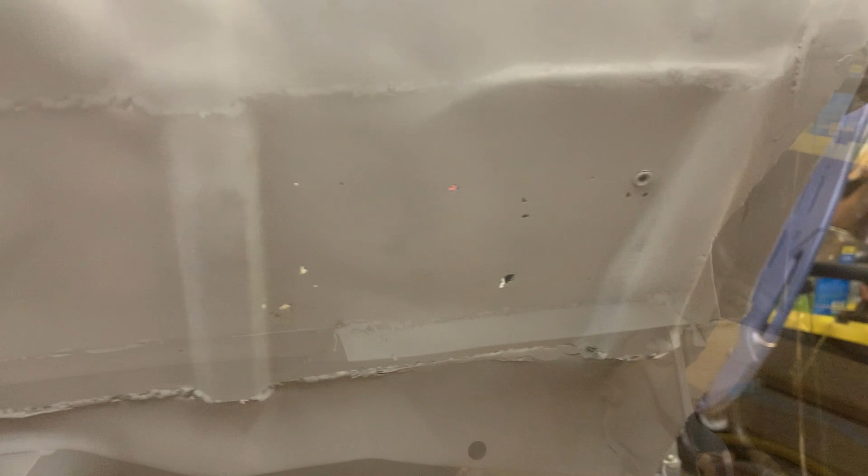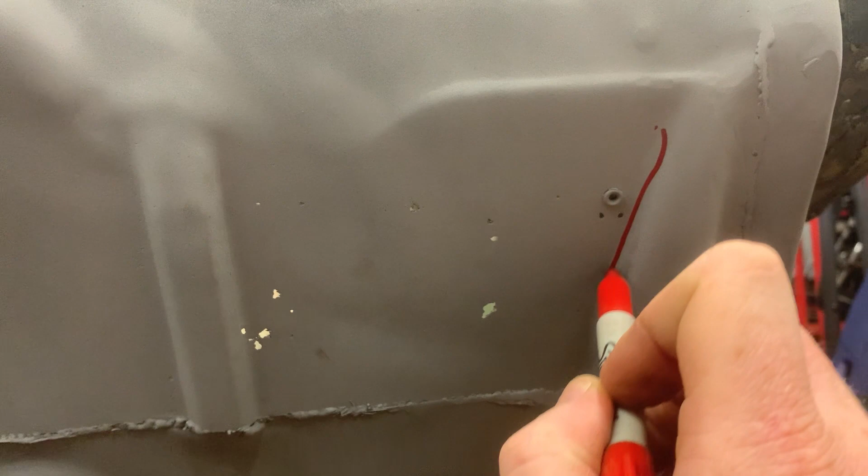So the first thing we're gonna do is come in here and mark where we're gonna cut it out. I'm marking really for you guys as I know where I would like to cut it, and I'm gonna come in and pretty much lay a line right down here and then across, make my line a little bit straighter. I want to stay above this weld because this weld has already been done.

And then we're going to cut down here, and we're going to cut across the top. Obviously my line isn't straight. We're going to try and make it as straight as possible so that we make a perfect square style cut, so it's a lot easier when we go to make our panel to cut out. So first things first, we're going to mark the rest of this, and then I'm going to start cutting it out.

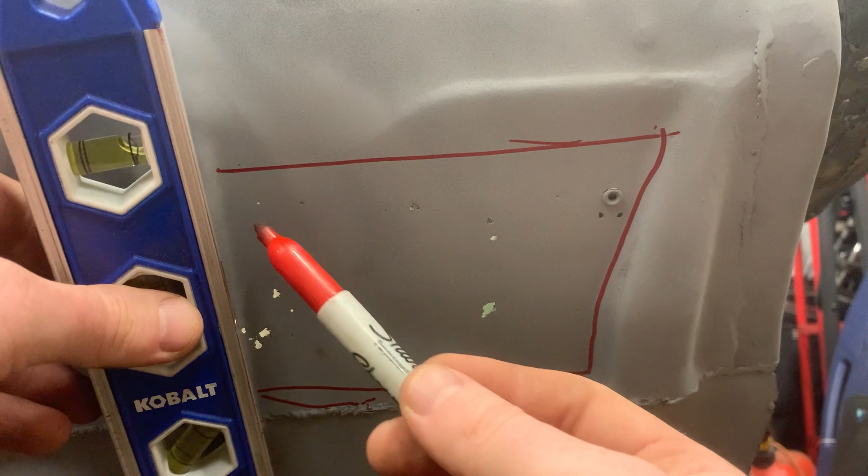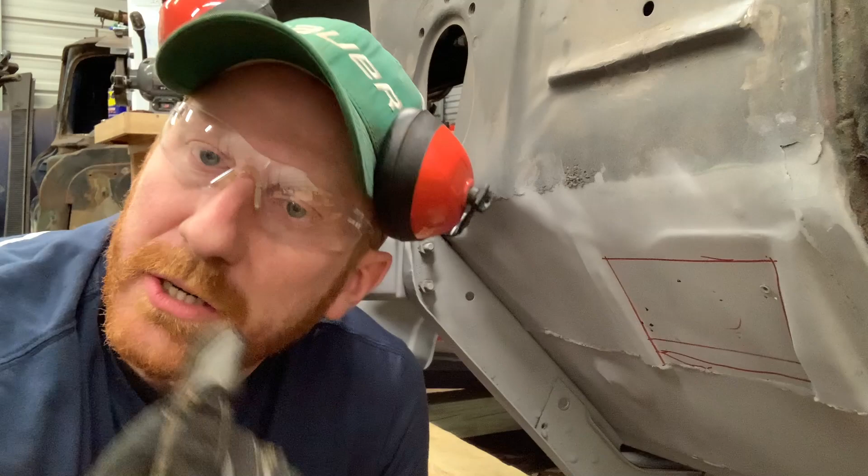All right, so we have the box where we need to go. So now we're going to come in with our grinder and our cutoff wheel, not a grinding wheel, a cutoff wheel, and cut out our box of dirty metal that we need to get rid of. Make sure you guys wear some eye protection. You don't want to get a spark in the eye and get an eye infection or even lose your eye. That's not worth it. And make sure you wear your hearing protection because losing your hearing will suck too.

So what we're gonna do is I'm gonna cut it out and we're gonna take it over to the table and line it up and measure it against some new metal and cut out a new piece.

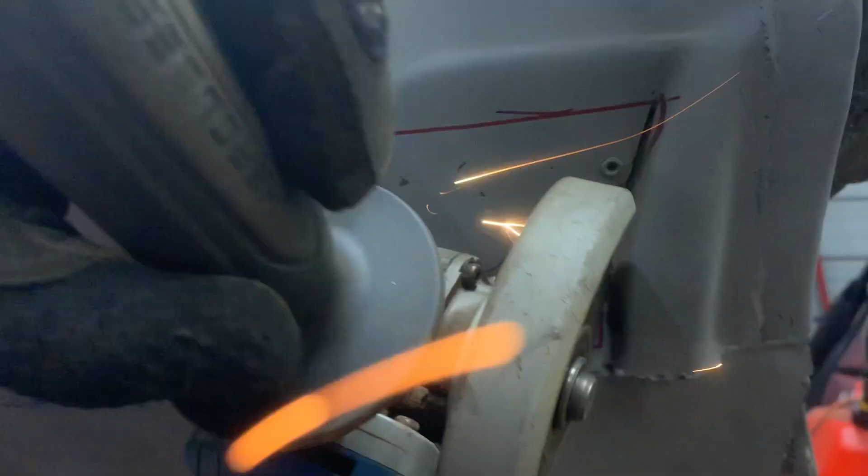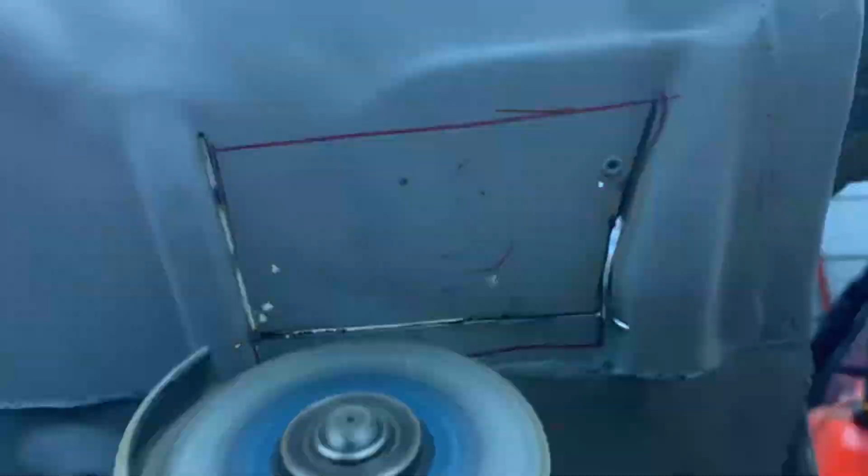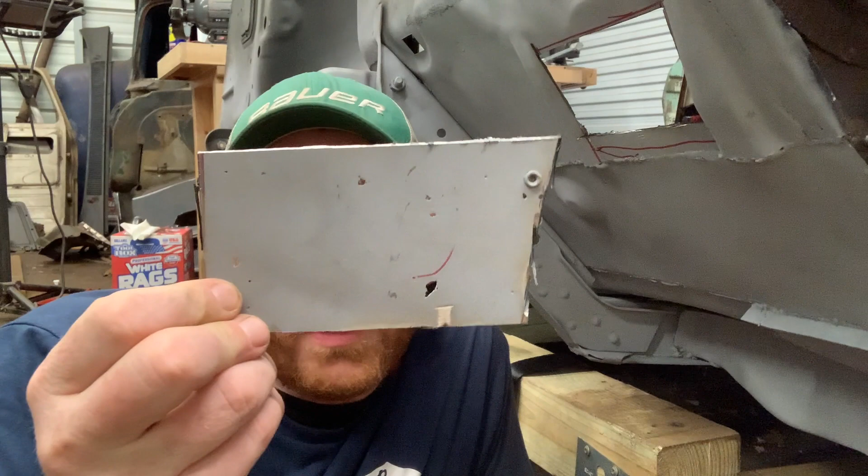So say goodbye to that dirty, ugly metal. And we look at this side and this looks pretty good. The metal looked nice and thick from the outside, but let's see what it looked like from the inside. And that was bad. So good thing that the sandblaster blew some holes in this. So we went and checked the rest. The rest is fine. Don't know why that one spot is just bad.

Like we come in here, this feels nice and thick and strong. So does down here, and so does the rest of it. So this one bad panel, it needs to go. So now what we need to do is walk over to the bench, take out some new metal, trace this, and cut it out so we can put the new metal in.

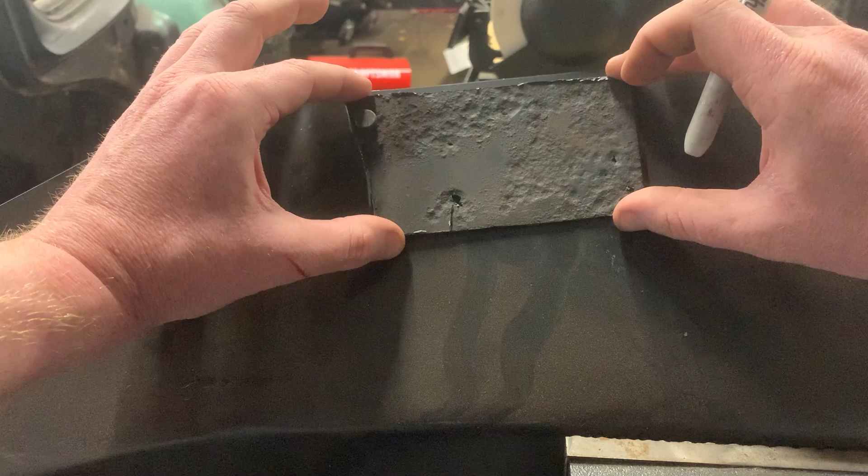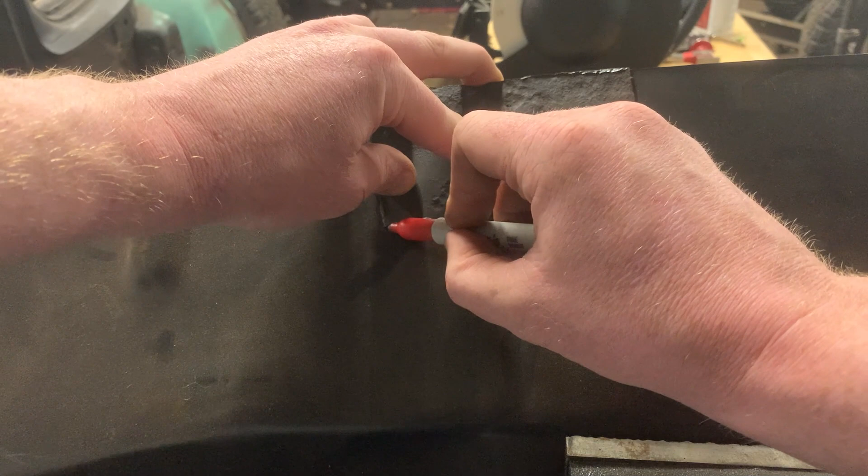All right, so we have our piece of metal right here, and what we're gonna do is line it up, and then we're gonna use this top line as our top half and come in here and draw some markings so that we know where to cut. So we have that, we have this side, and we have the inside that we need to line up like that. So there we go. So we have our box of where we need to cut right here.

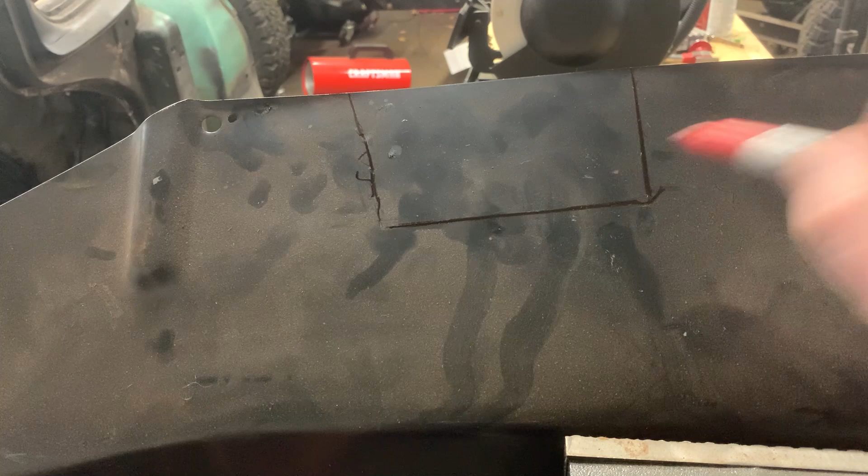We're probably gonna come in just a little bit on all of these lines so we have a gap for when we weld, so that when we're welding, it fills in the gap. So let's head over to our board real quick and talk about that. All right, so what we're gonna talk about right here on the whiteboard real quick before we cut this panel out and start welding is the gap.

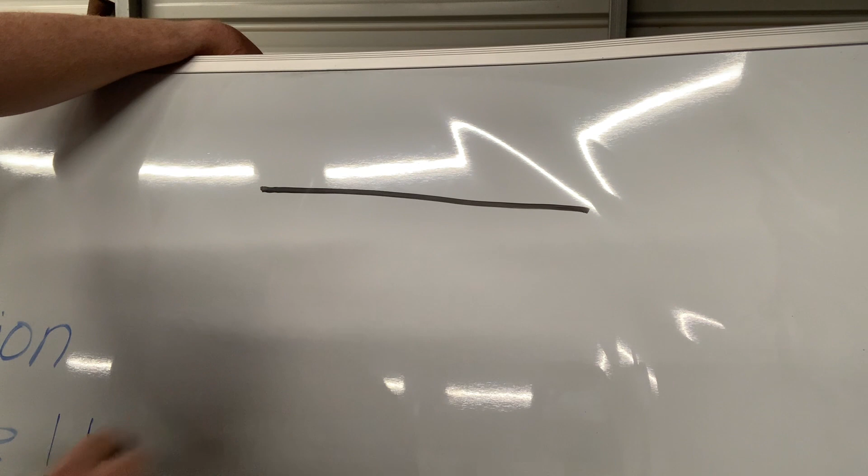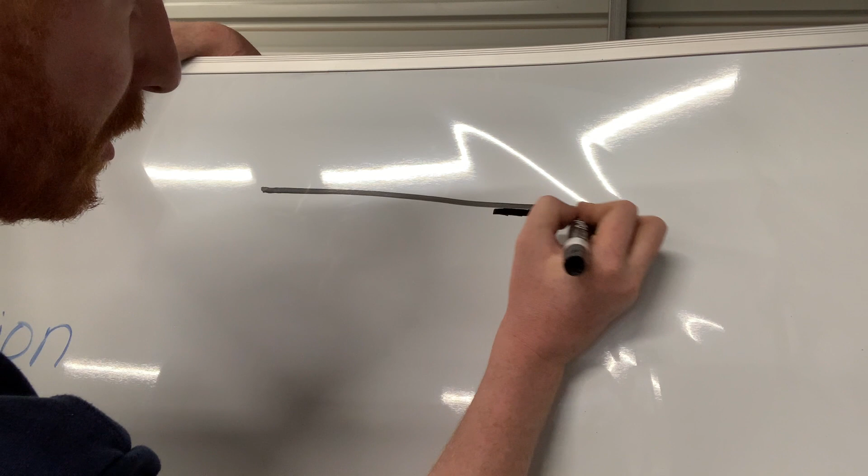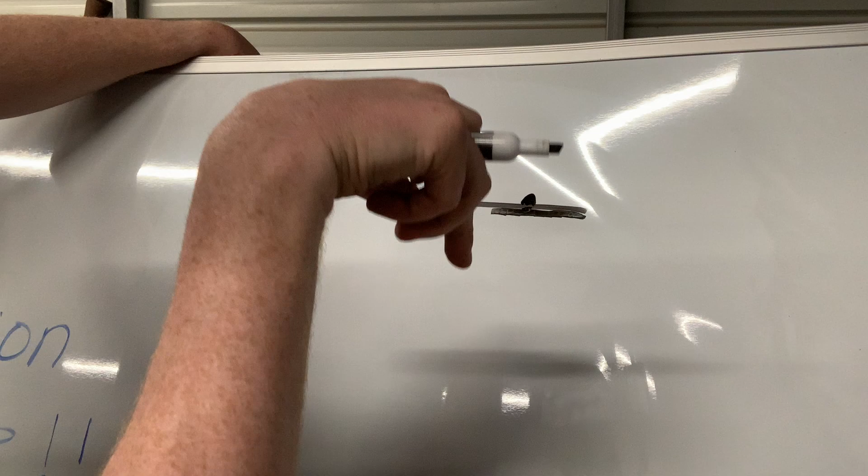So the gap that you have is gonna determine how good or bad a weld you have with the other panel. So if, say we draw right here, a piece of panel where we left pretty much no gap in between it and the two pieces of metal butt up, if we try and weld in there, we're just gonna get big, almost lumps on it rather than the weld penetrating. And that's what welding is all about, is penetration in between the two pieces of metal and making them get together.

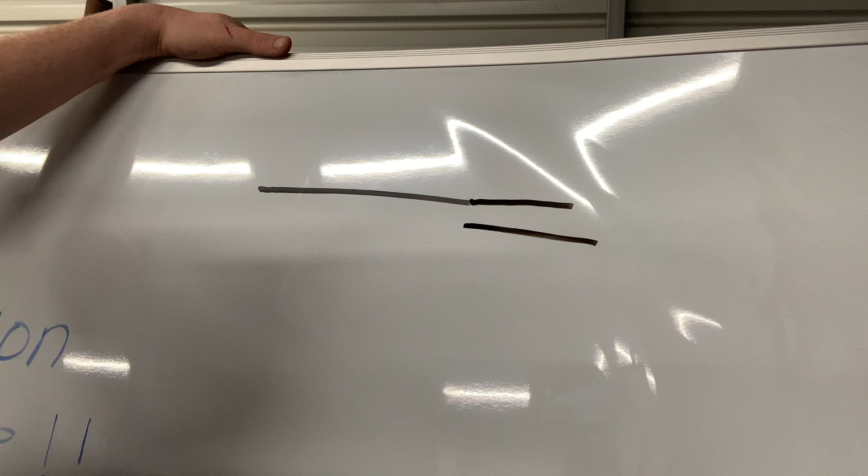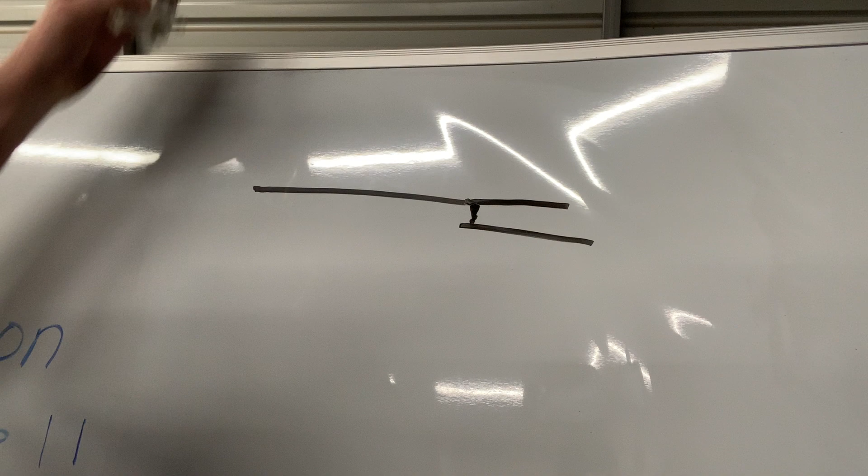So now, let's say we come in and we have our original piece of metal and we go too wide. We're gonna have to attempt to build up and make welds to combine them, which is not gonna be strong. This metal is gonna be weak, and when we go to grind it, it's gonna make that weld even weaker, where it's gonna crack and you're gonna have problems.

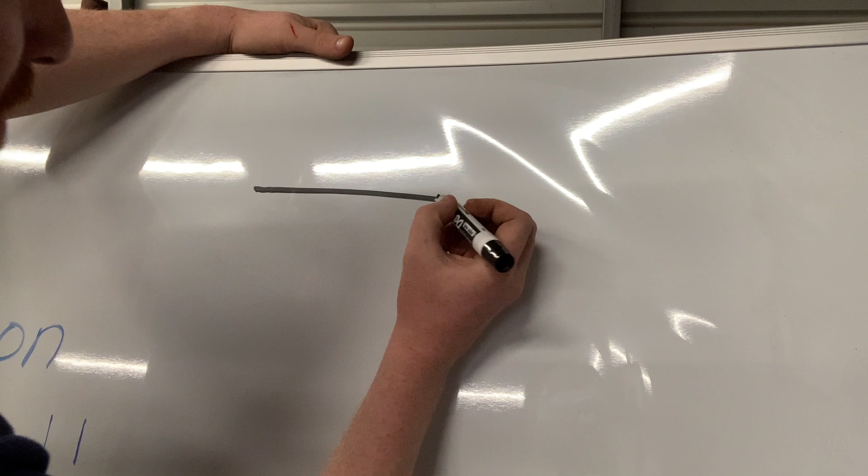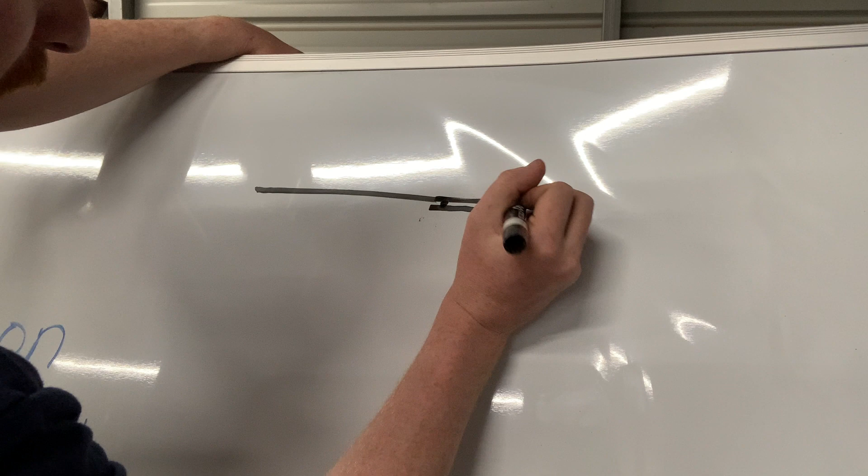So what we need to do when we weld is we come in and we have our metal. We want a nice, even, small gap. Not a huge gap, just a nice little small gap. And first and foremost, you're gonna leave a little spot, tack weld in there to tack the two pieces together, and just go down and continue that along the piece of metal.

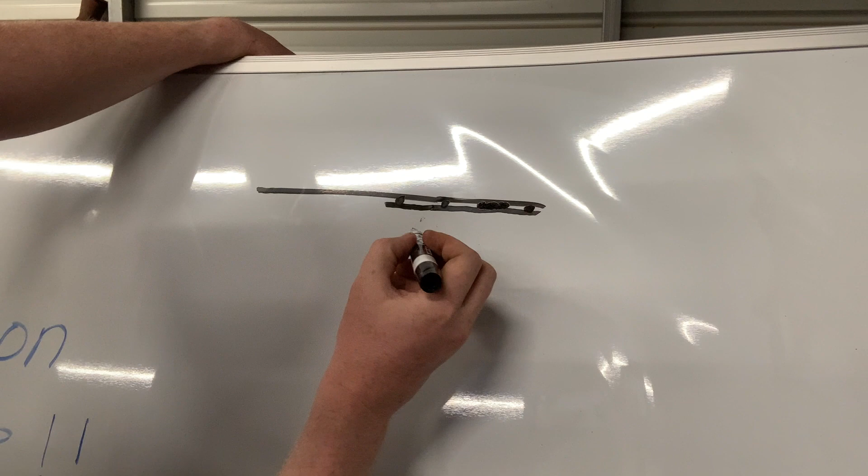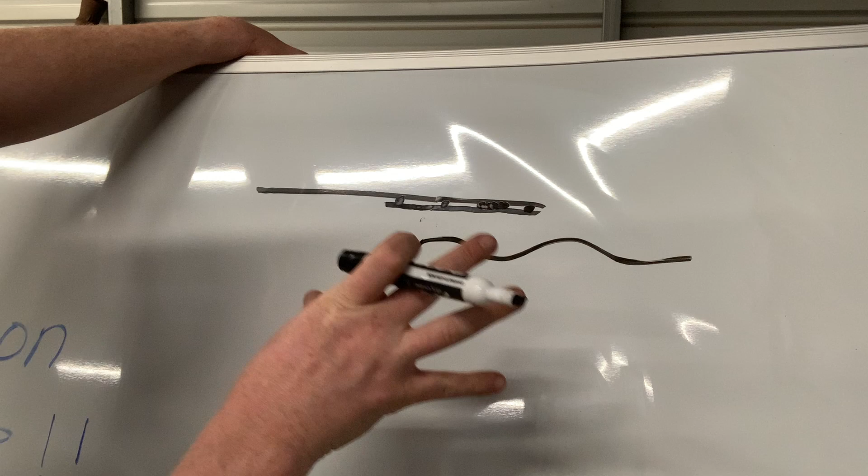And the reason we do that is we don't wanna tack every second and go like this, because unfortunately, the metal will start to warp and your panel will start to be like that. Now, if we spread and dissipate our heat as we go, that's not gonna happen, or not gonna happen as bad, and you might end up with a little bit of a curved line like this rather than this.

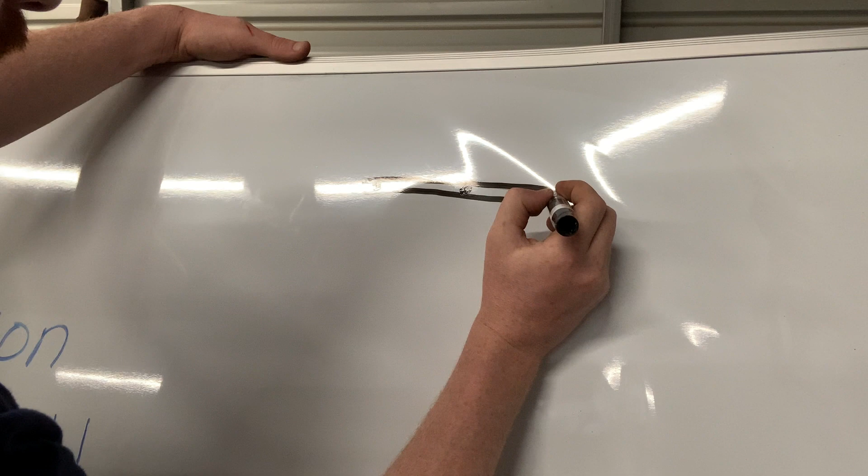So when we're welding, we wanna have a nice, even gap in between our two pieces, and we weld, and we weld. Then we come back and we do a couple welds there, over here a couple welds, and we just keep going down until all of this is clean and solid and has no holes. We come back and we grind it down.

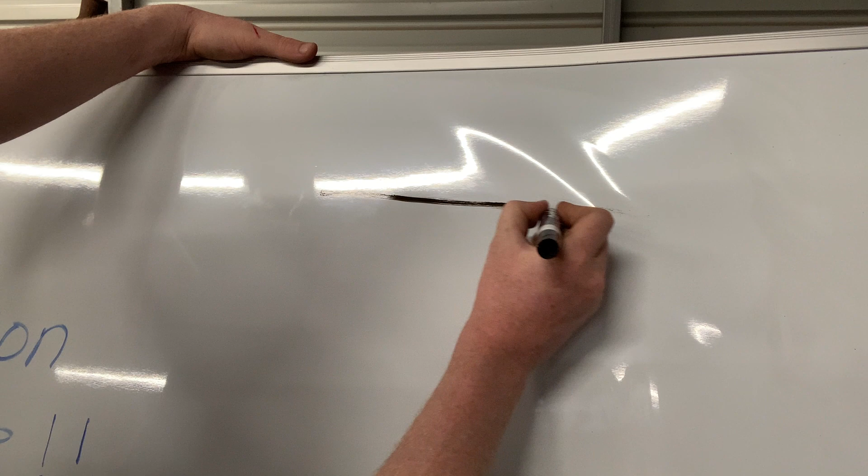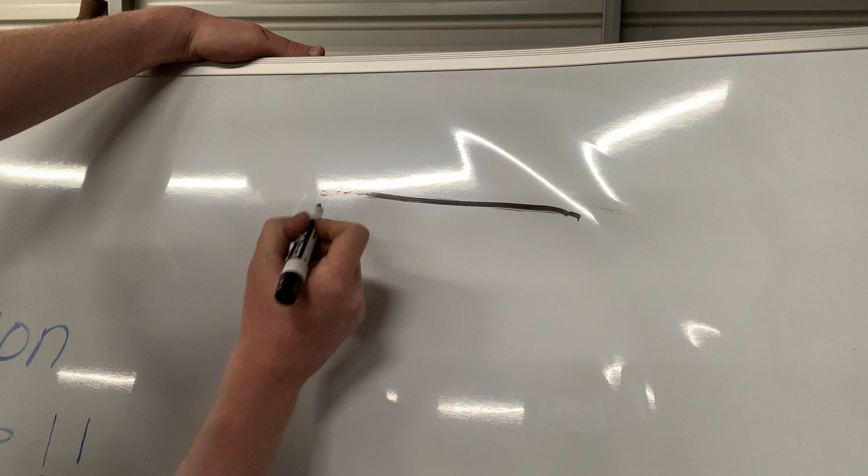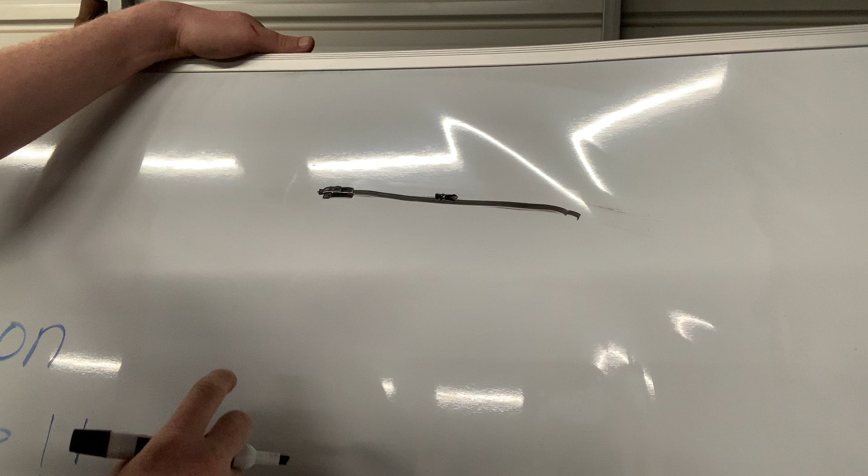Another benefit, we're gonna look at this like it's the top half of our two panels together. If we weld a small gap together, we're gonna just get nice little bumps of weld that we can grind down and make flush, and we have our penetration through the bottom. And that's the important part. Let's do that right here because I can see the glare. So we do our welds up here. We have a nice little bump, not too bad. We can always grind that down, but it also penetrates the metal.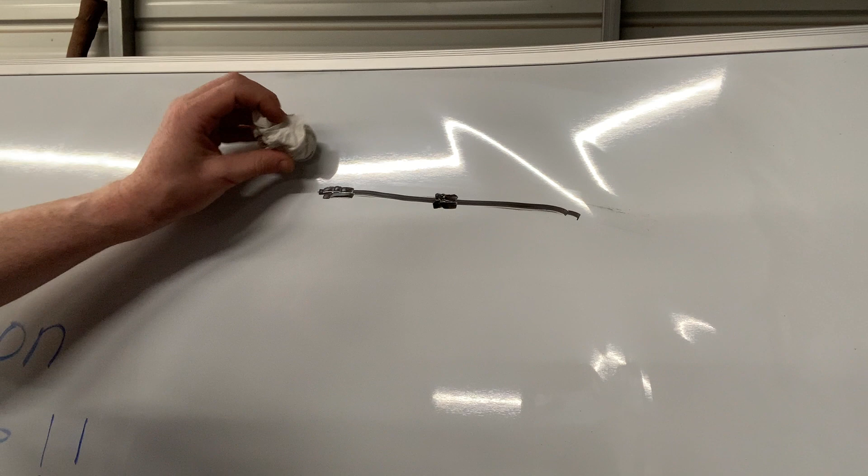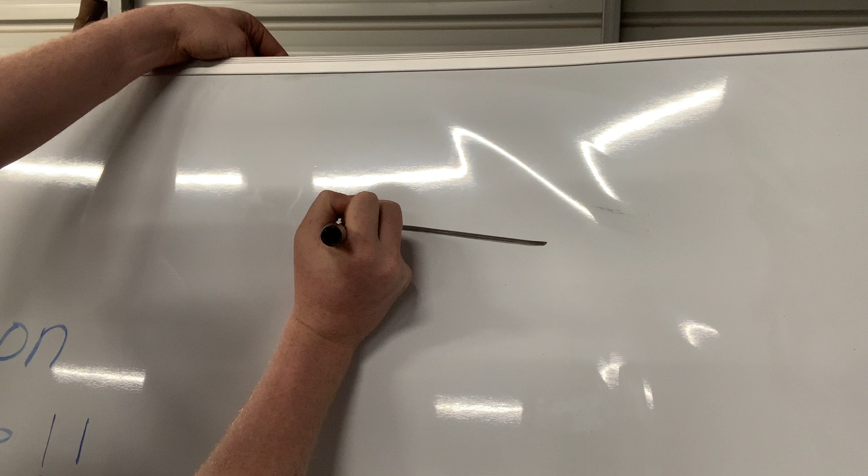Now, if we have too big of a gap, you're not gonna get good penetration. You're gonna get penetration, but the penetration is gonna be droopy. It's just not a good weld. If we have a big gap, you're gonna leave maybe a little thing, but if you start welding, you're only gonna have a little bit of penetration through the bottom because it's not that good.

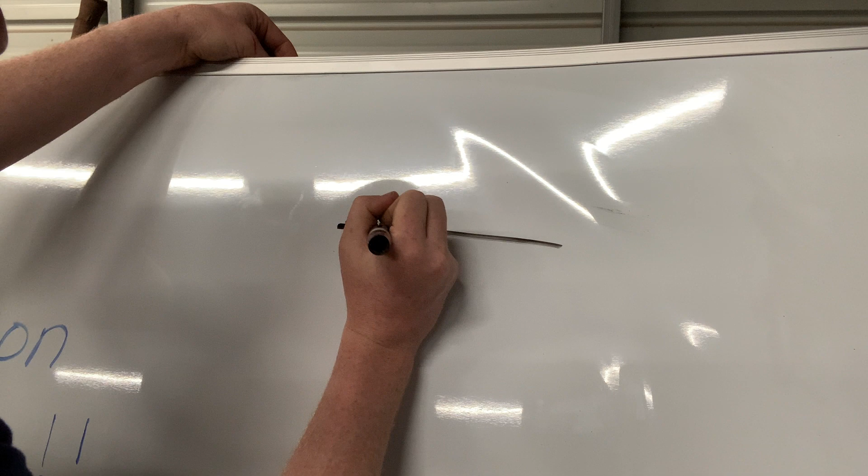Now, if our panel is extremely close, what's gonna happen is when you weld, you're gonna get big lumps like this and absolutely no penetration. Penetration is the key to welding. It makes your panel strong and it keeps it together. So now what we're gonna do after we have this little class, we're gonna go cut that piece of metal out. We're gonna start welding and make sure that our gaps are all lined up and good.

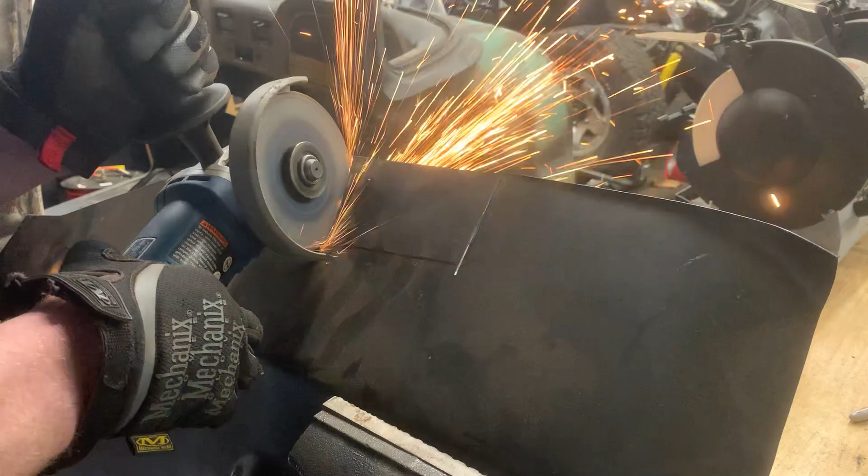All right, so here is the panel and it looks amazing. And here is our old one. So if we line it up, there's not that much off of either of them and they look amazing together. So all we need to do now is weld it in. But first, there's some steps that we need to go through before we start welding.

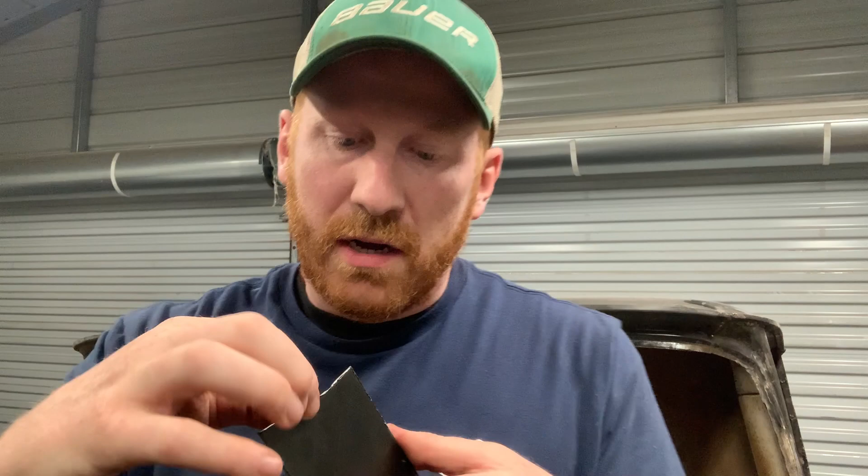So we do have to clean this metal up a little bit on the sides. It's a little rough. You can kind of see it there. We need to cover that. And we need to take some of this coating off, as well as take off some of the truck where that is, to make sure it's nice and even and it's metal to metal. Then we're gonna line it up and weld, and we're gonna walk over to the welder and show you the process of one, turning it on, and two, having it set. Ours is pretty set up already, but let's go ahead and grind back this coating so we can get to some welding.

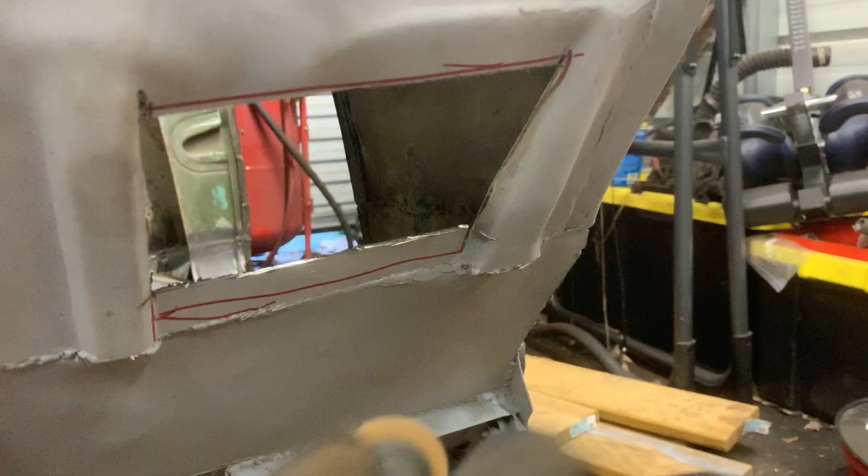Right, so here we are at our welder. We have our metal ground down. We also have the truck ground down to where it needs to go. So here we are at the front end of our welder. We have our on-off switch over here. We have our wire speed and we have our voltage.

Do not turn the voltage while welding. It even says it right on here. Set it, and that's where it's gonna be until you stop welding, like pulling the trigger. This is a MIG welder. This is a Hobart. It is a 210 MVP. It's done us really well. It has welded our cab very well. And it's pretty self-explanatory on how to set it up.

On the side of the welder, there is a chart, and it has whatever your wire thickness is and what it recommends for everything else. So up here is your wire speed. The slower it is, the slower the wire is coming through the gun. Now, the voltage is how hot the element is gonna melt that wire. So if we have high voltage, the wire is gonna melt inside the gun, and it's not gonna get to the panel.

For the thickness of the metal that we have, the 18 gauge metal that we're welding, and the wire thickness that we have, which is 0.023, this is right about where this needs to be set. We can adjust it a little bit faster if we notice that the wire is coming out too long before it melts. It's pretty spot on.

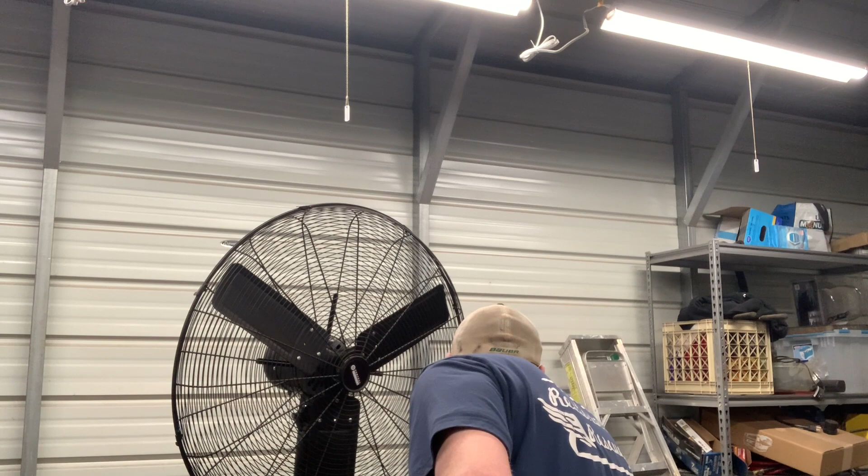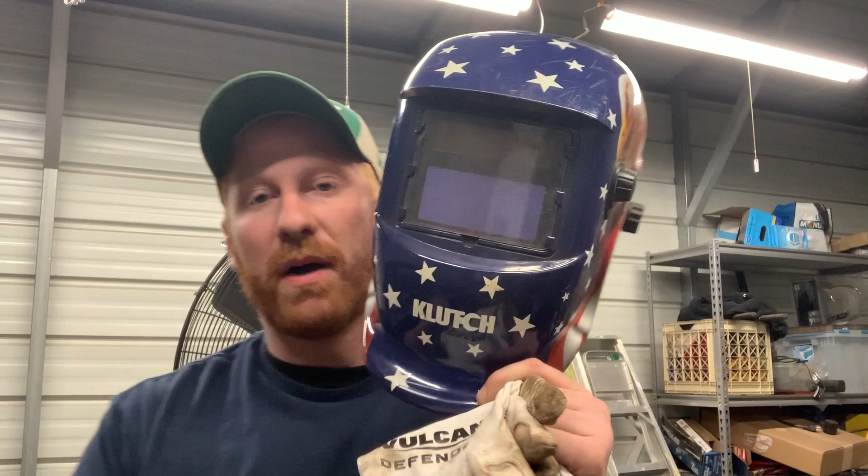So there are two different types of helmets. Let me see if I can get mine back here. Yes, I can. So I have this. This is an auto dimming mask. So when I start welding, it changes colors. When I put it on, it's pretty bright. When I start to weld, it dims.

So that's pretty cool. And there's also non-dimming ones, which is the one that Tim has with the awesome fighter pilot look on it. That one just always stays dark, and when you weld, that's when you begin to see, which is a little difficult for me to weld with. I've tried it. I like to have a light set up with me so that I can see everything I need to see. So what we need to do now is set up that ground. We need to get the panel in place with some magnets, and now we can actually start welding.

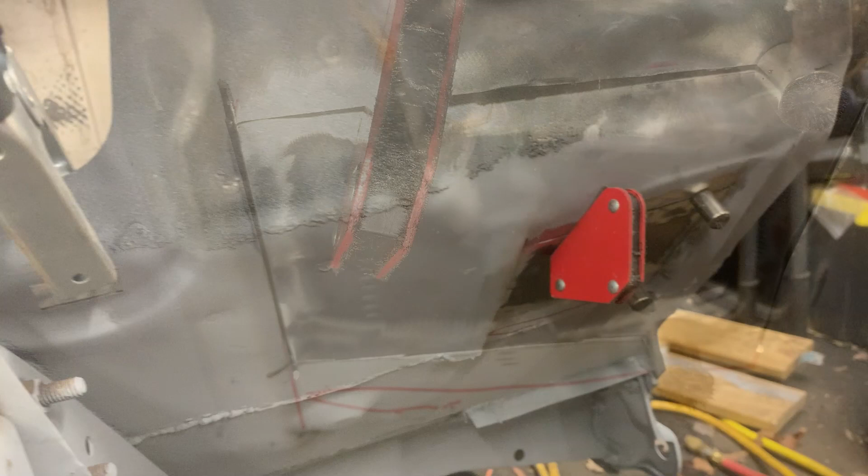All right, so you can hear in the background that my welder is on and it's running. Our gas is on. You always turn the gas on first before you start welding. We have everything pretty much set where it needs to go, and our gaps are looking pretty good, except for right here, it's a little wide. Not that big a deal. We're gonna work with it. It's not atrocious. So we have our ground set. We have everything set up for this thing to weld. We have my light right over here off to the left.

And what we're gonna do first is lay some tacks. When we go to lay our tack welds, we are going to get across and make almost a pattern around the panel so that we make sure the panel doesn't go anywhere, and then we can start getting rid of our magnets. So once that's good, we'll get those tacked in. What a tack is, we come up here, we hold on for like a second, maybe two, not a very long hold on your button, and you kind of want to make a little bit of a movement with this to make it a nice circular style weld. So what we're gonna do is lay down some tacks.

There's one. We're gonna come over here and do another. And we're gonna keep going around the panel and continue to do that. Those are all right, and we wanna hold our torch near the panel for a second after, so that we make sure that argon is protecting that weld.

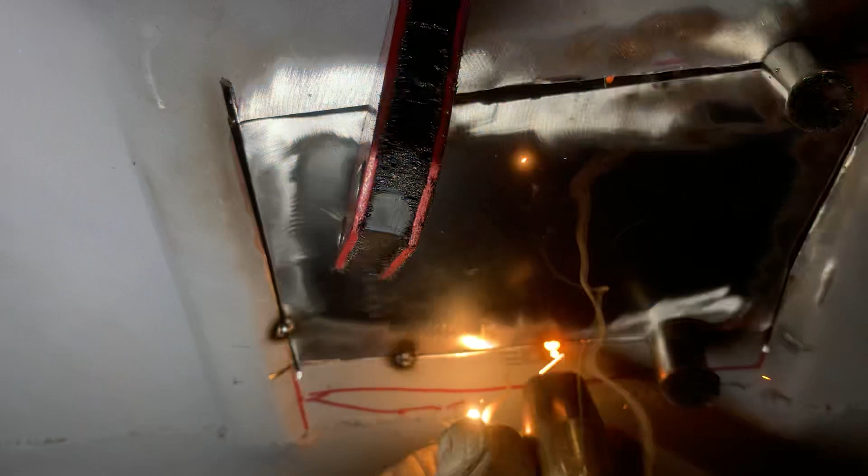So those aren't perfect by any means. This one up here I kind of missed, and this one is not full. These are pretty good down here as well as over here, and this one I flat out missed again. A little bit is the light, but that's on me. I'm not trying to blame anything else. So those turned out pretty well.

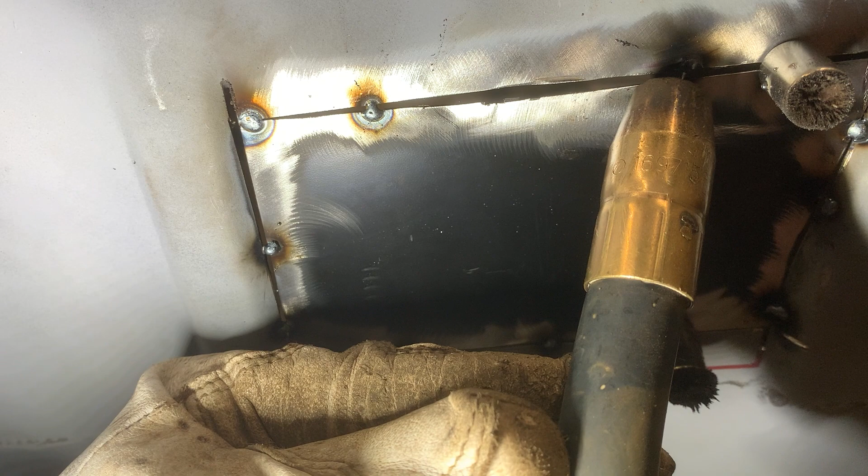So now what we need to do is start going around and go back and finish where I missed. So like right here. And I didn't have a good connection. There we go. There we go. That one's in. That one's better now. So now we have those done. We can probably start taking the rest of our magnets away. So the panel is pretty lined up.

We have maybe a little bit of a gap here. And all we'll need to do there is take our hammer, which is behind me, and lightly tap on this to even it up. Or you can always take like a screwdriver and push it in, but otherwise we are pretty lined up. So now we're gonna start tacking it and jumping around again until we have enough that we feel comfortable that we can start welding.

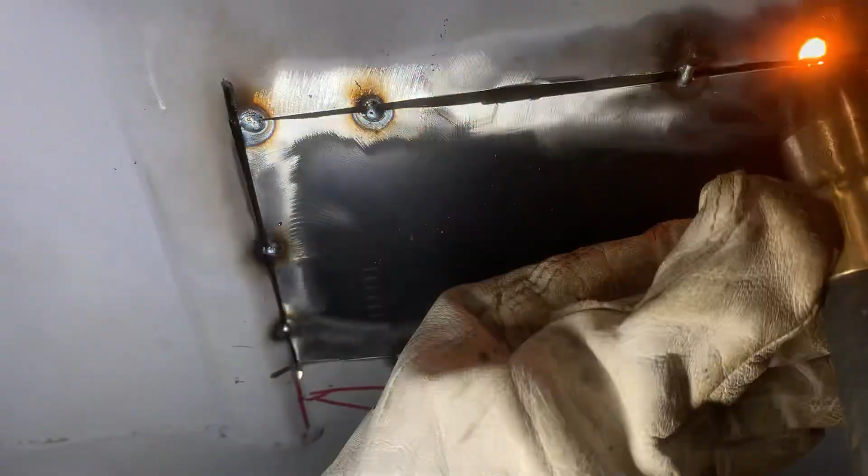Hitting the spots. So right here it's a little bit wide. So what we can do is start building almost like a bridge to cross it. As you can see, we had to make a couple welds in there to get it attached. That's a little wide, not what we like. Around here is perfect, right down here is perfect. This is gonna be easy to weld. We're gonna come right up in here and be able to lay nice, beautiful tack welds down.

We do have to cover this spot right here and a couple of the overcuts, and that's just because you have a circular blade. So let's continue to just start welding across the panel and get this thing where it needs to go.

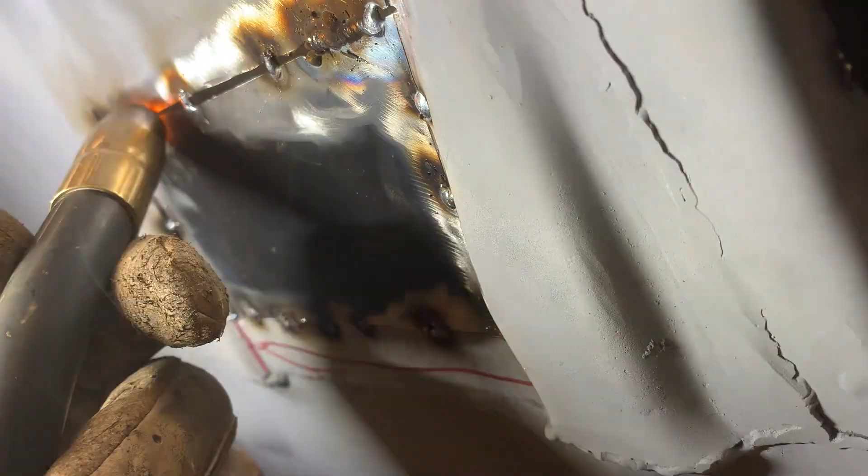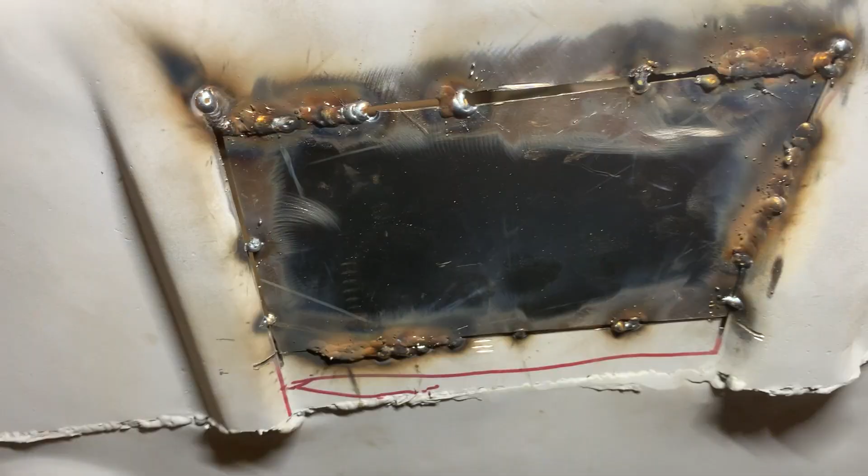All right, so as we come in here, you can see we had a little bit of a blow through. Not too bad of a blow through, but we were able to fix it. We had one over here, we were able to fix it as well. And we're just running up and down the sides. So we have some stuff that we need to do. We had a little bit of blow through on this panel, which is not usual. But we're gonna continue to keep going around. And there's a couple things I wanna show you and have you guys listen for.

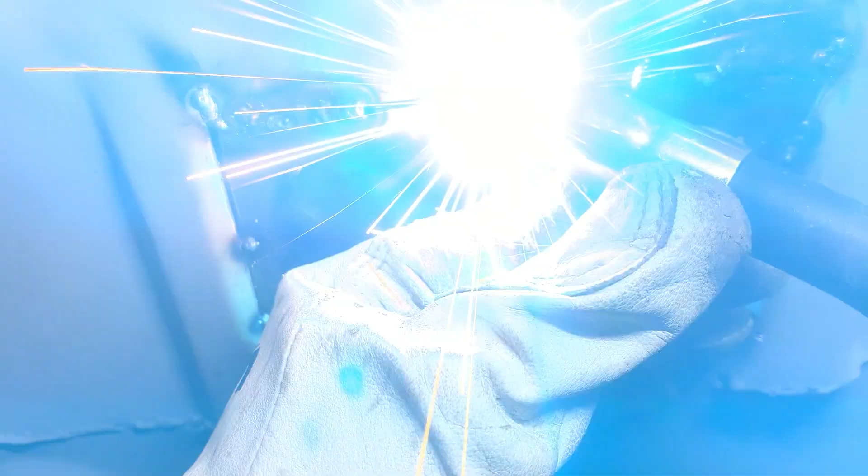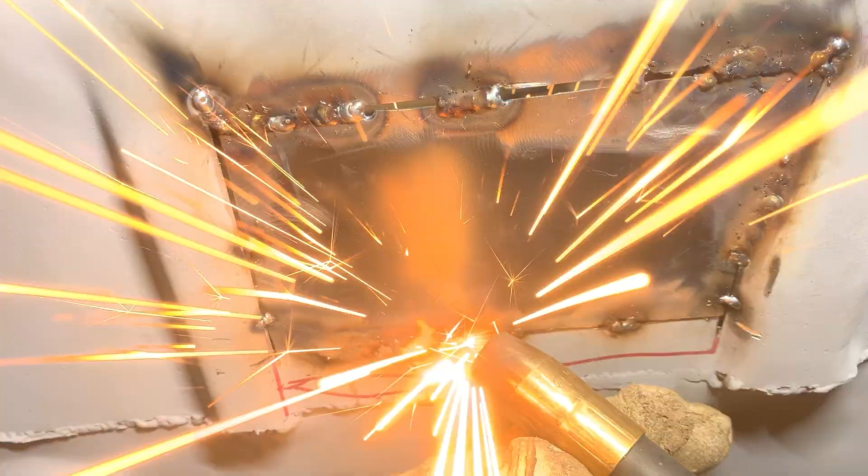When you're welding, you want to have it weld and sound like crackling bacon. Pretty much not like that, but more like something like that. We have that nice sound, almost like crackling bacon, and we just keep working. Here is not that hard, we can start building. Unfortunately, the littler gaps, we just keep working our way along. That was perfect, that sound. Right? That sound is the perfect sound.

Hold it a little bit as you go, and just keep working around the panel until it is all welded up. This, we were a little bit low, so I gotta go back and continue to weld in between where it's supposed to be. It's just a little awkward with the camera so you guys could see, but we gotta get up into there and close up those holes and just keep going around the panel and keep welding.

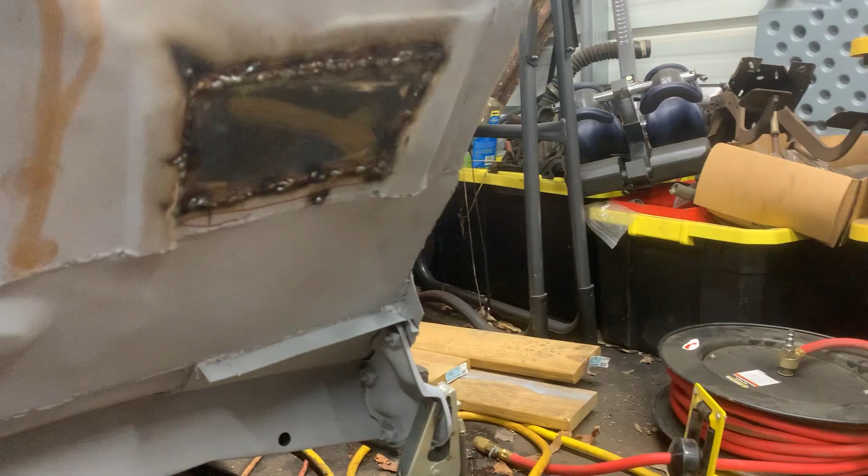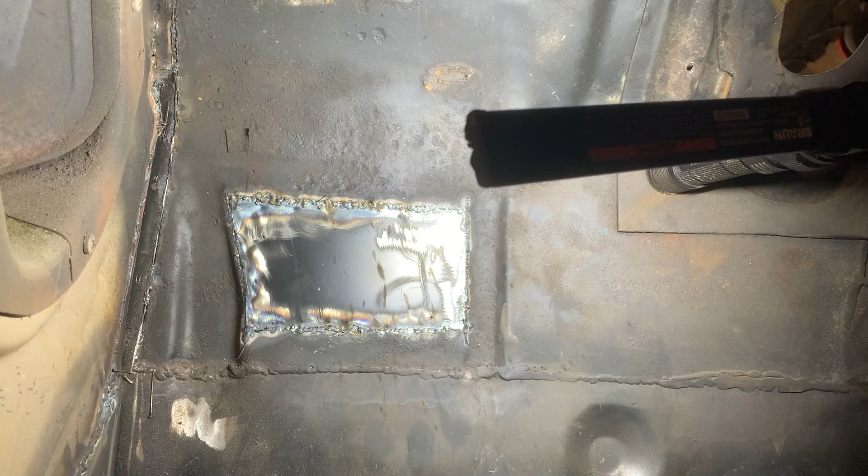So here is the inside of the cab. This is the back side of all our welds that we did today. And we can see some really nice penetration. Penetration is key when we are welding. The penetration is what keeps the metal together.

So when you weld, there's the two panels that come together. The in-between is what you're shooting for and you hit. The same as when you spot weld two panels together. If you get good penetration on a spot weld, you can see it through the back.

Don't know if I have any out in the open that I can really show us, but right now what we need to do is we're gonna go to the outside of the cab and we're gonna show you those welds and give you a little bit more tips and keys on the outside.

All right, so these welds look pretty good, pretty well put together for the most part. Up here, it's a little more difficult because they were a little bit spread, so we had to build a little bit. But down in here, you can barely tell that there's even welds there right now because they're just so perfect. Down here, we had a little bit of missteps when I was miswelding, but we got that taken care of. Up the side, we had a cut and it made a little bit of a hole, so we were able to take care of that.

But this is all welded, and what we need to do now is just go ahead and grind all of those welds back so they look nice and uniform, and try and make this panel look like it was never even out.

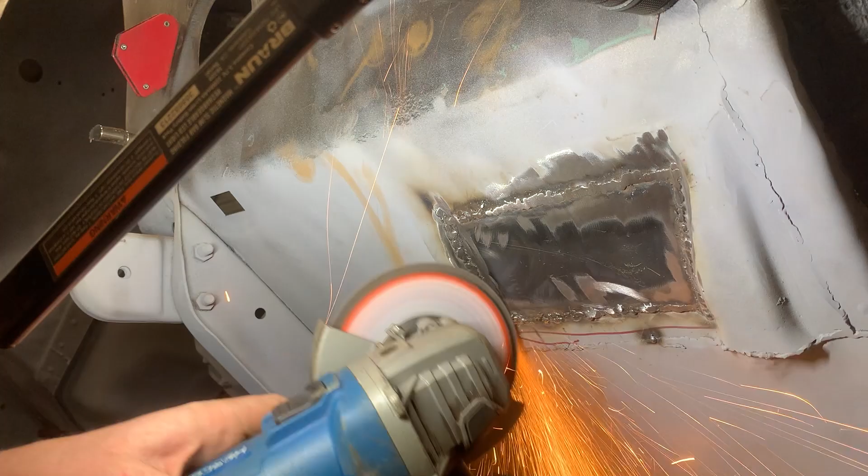So that looks pretty good for our first weld. Not horrible. We might have to go back in and toss a couple of welds in there. So let's take a look if we got any light through. No light through right now, which is good. That means we have pretty solid welds, especially with the penetration, even in the weaker spots.

Yes, we have some more grinding to do, and that's when we start changing the grit. The grit that we used right there is 36. That's to kill major mounds of it. Then we got to come in and do smaller grinds and just grind it flat, and this thing will look gorgeous. So we gave you guys a guide of welding that we go through.

So we want to keep our gaps very tight, because the bigger the gap, the weaker the weld. But if you're too tight, then you get no penetration. Penetration is key in welding. So is your machine. So the better you can set your machine, the less blow through, the better welds you get, and you don't have to worry about weak welds.

I feel like my welds have improved so much through these couple months of welding that I feel comfortable sharing with you some of the things that I've learned along the way. Yes, I am not perfect, and I guarantee some of the professional welders who've been welding for 40 years are gonna come on here and tell me, well, no, this is how you do it, this is better. And I appreciate that, actually.